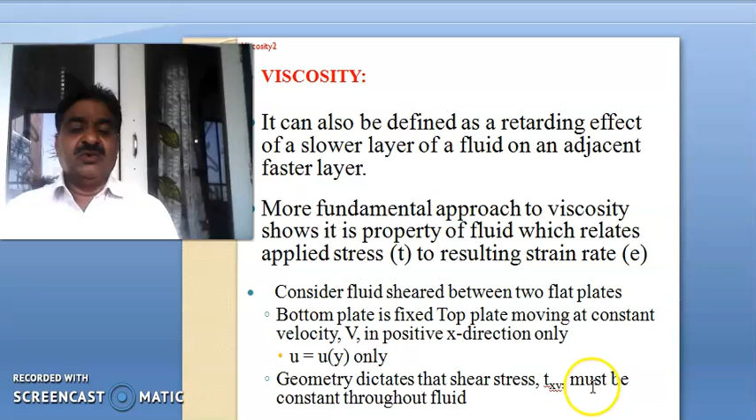So here consider the fluid sheared between two plates, in which the bottom plate is fixed and the top plate is moving at constant velocity v in the positive x direction only. Then u is nothing but u of y only. Geometry dictates that the shear stress tau xy must be constant throughout the fluid.

Now let us turn towards the streamlines. What are streamlines? Streamlines are defined as the path taken by particles of fluid under steady flow conditions. If we represent the flow lines as curves, then the tangent at any point on the curve gives the direction of the fluid velocity at that point, as shown in the figure below.

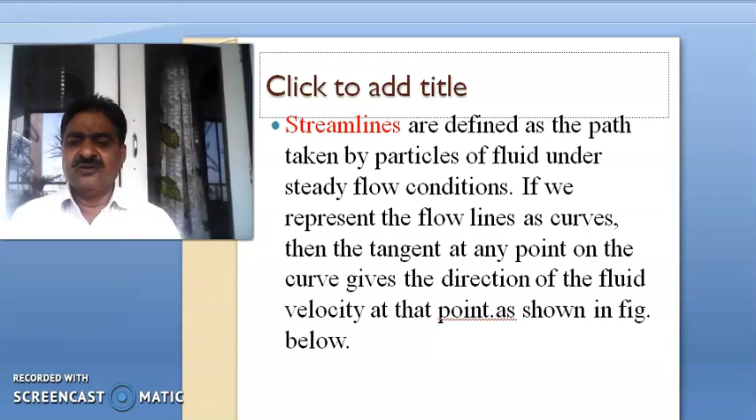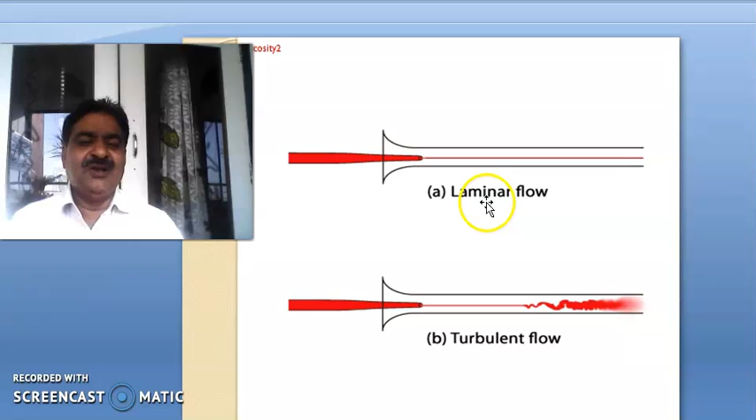See here, carefully observe. Suppose this fluid is flowing like this in a line. Different layers have different lines and they move parallel to each other. Such a flow of fluid is said to be laminar flow, or it is also called streamline flow.

If the velocity of this flow is increased to a certain value, then what happens in figure B, you see? Here fluid is going to flow and the velocity is going to increase. At a certain velocity of the fluid, the parallel lines are removed. I mean there is a mixing of the layers of the fluid after a certain velocity.

That velocity is said to be the critical velocity, I mean the velocity of the fluid from laminar flow to turbulent flow. When turbulent flow begins from a certain velocity, that is said to be the critical velocity. Remember, in turbulent flow the parallel lines of the fluid mix with each other. There is a zigzag flow of the molecules of the fluid.

Here you see, there are two plates. One plate is fixed and the other one is moving. Suppose the height of this liquid from the fixed layer to the moving layer is y. Then shearing stress tau is nothing but force upon area. Shearing stress is proportional to velocity gradient. See here, v is the velocity of the fluid.

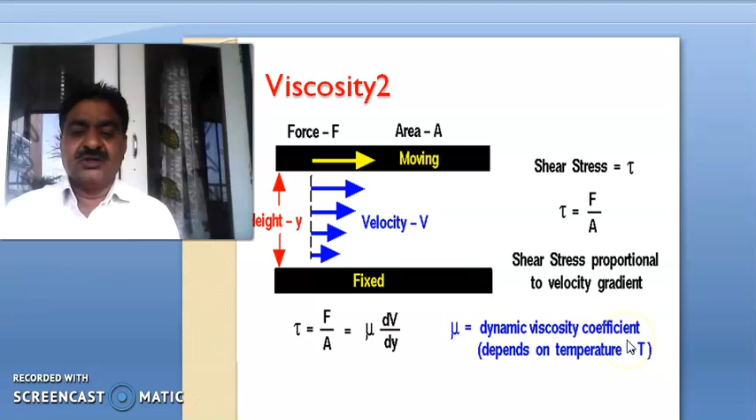Perform the experiment for all common fluids. Applied shear is a unique function of strain rate for a given V, txy is constant, so du by dy, that is exy, is constant, so that

the resulting velocity profile is linear across the plates. So these are the two plates, the fixed one and the moving one, and surely the velocity of this plate is more. As we go from bottom to top, the velocity of the layers gradually increases.

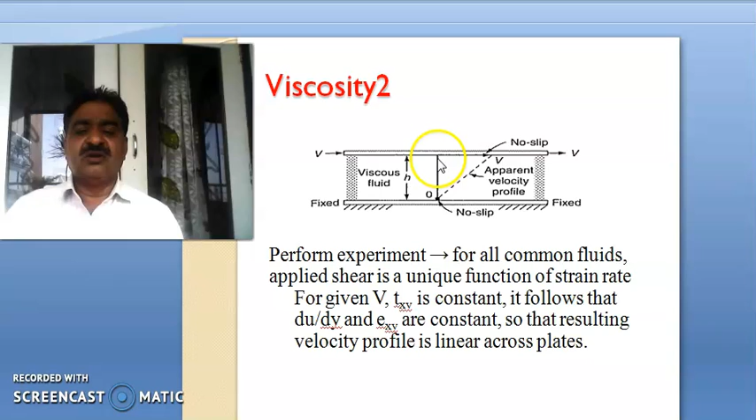Fluid dynamic or shear viscosity formula: mu is equal to Fy upon Au, where mu is dynamic viscosity measured in Newton second per meter square. F is the applied force in Newton, and y is the separation distance in meters, how much they are separated.

Sometimes it is given by the letter h also. A is nothing but the area of each plate in square meters, and U stands for speed in meter per second. So the fluid dynamics or shear viscosity formula is mu is equal to Fy upon Au. Remember what is F, what is Y, what is A, and what is U.

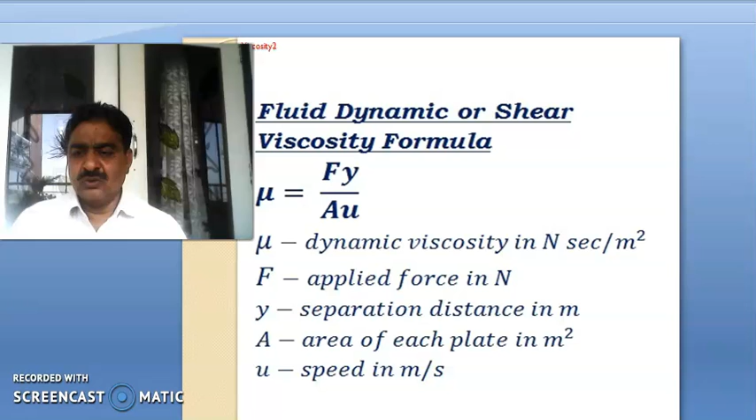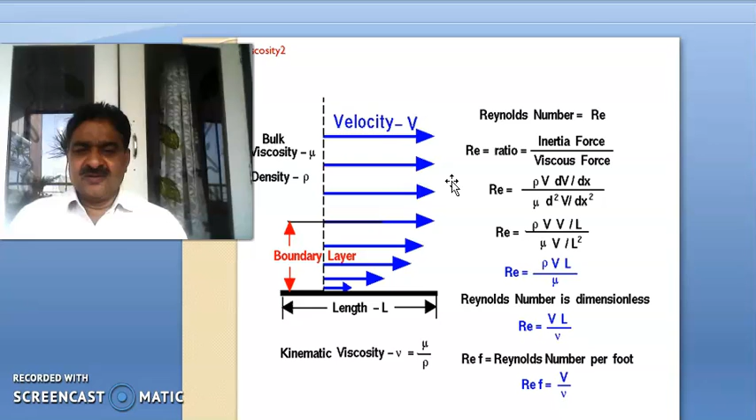Now here the picture clears. There is a Reynolds number. What is its significance? What is it? All these things we will discuss.

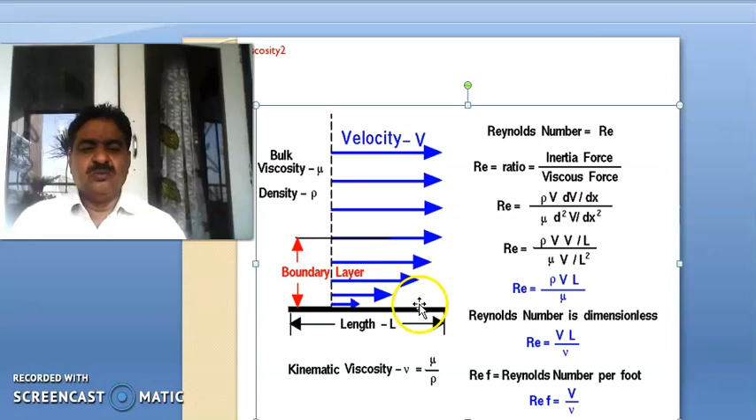Velocity is going to increase as we go higher and higher, up to higher height, or from bottom to top. In this case, suppose this is the length. Reynolds number Re is nothing but the ratio of inertia force to viscous force.

It is given by the symbolic representation rho VL upon mu. Reynolds number is dimensionless because it is a ratio of forces. So Reynolds number is nothing but VL upon nu, with kinematic viscosity nu, where nu is equal to mu upon rho. Here Reynolds number per foot is nothing but V upon nu.

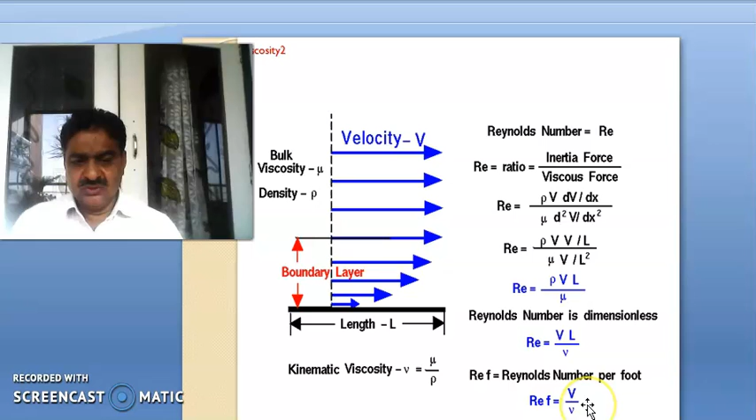Now let us turn towards the concept of streamline flow. Newton's law of viscosity gives the relationship between fluid stress and strain. The coefficient of viscosity of Newtonian fluid is measured in terms of Newton second per meter square. It is a thermodynamic property that varies with temperature and pressure. Already I have told you viscosity depends upon temperature and excess pressure on the fluid.

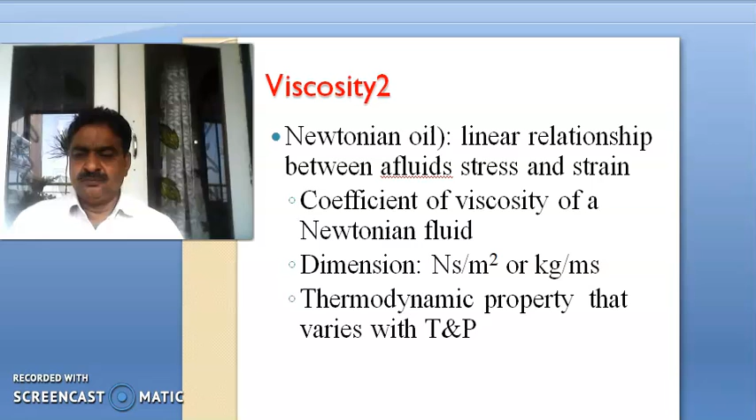Streamline flow in fluids is defined as the flow in which the fluids flow in parallel layers such that there is no disruption or intermixing of the layers. Layers are not going to mix with each other; they move parallel to each other. Such a flow is said to be streamline flow. The velocity of each fluid particle passing by remains constant

with time. At low fluid velocity, there are no turbulent velocity fluctuations, and fluid tends to flow without lateral mixing. The motion of the particles of the liquid follows a particular order, with the particles moving in a straight line parallel to the wall of the pipe, such that the adjacent layers slide past each other like playing cards.

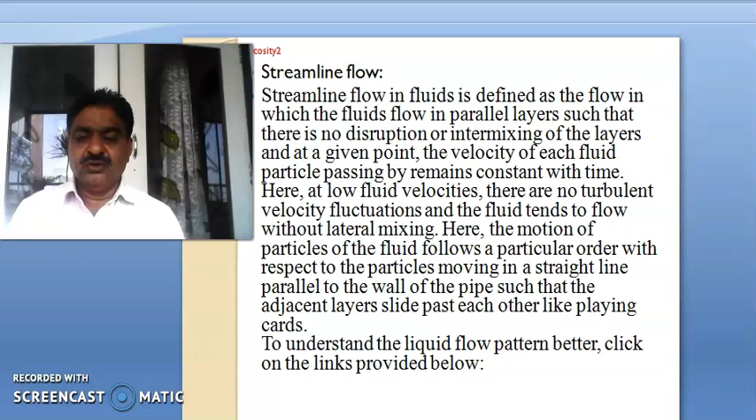These are the parallel layers. So we say that this is a streamline flow of liquid, because the parallel lines show the layers of the fluid moving without mixing, without intermixing with each other. So we say this flow is said to be streamline flow.

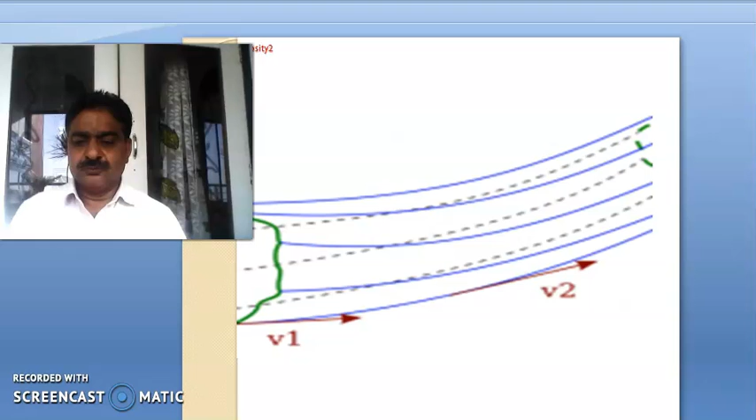This image shows the curve describing how fluid particles move with respect to time. The curve provides a map for the flow of this fluid for a steady flow. This map is stationary with time.

We can say that streamlines in a laminar flow follow the equation of continuity, AV is equal to constant. And in the last lecture we have seen whenever a reducer is applied to the pipe, the area of cross section into velocity equals the area of cross section of the reduced pipe into the velocity of the fluid. They are equal in nature. So we have already seen the continuity equation.

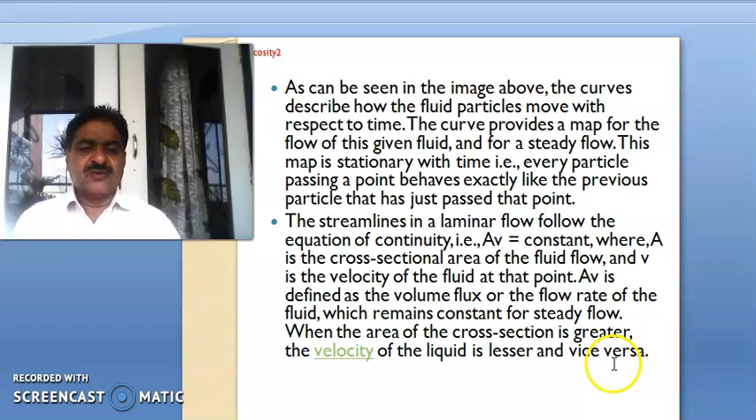When the area of cross section is greater, the velocity of the liquid is lesser, and vice versa. This also we have seen.